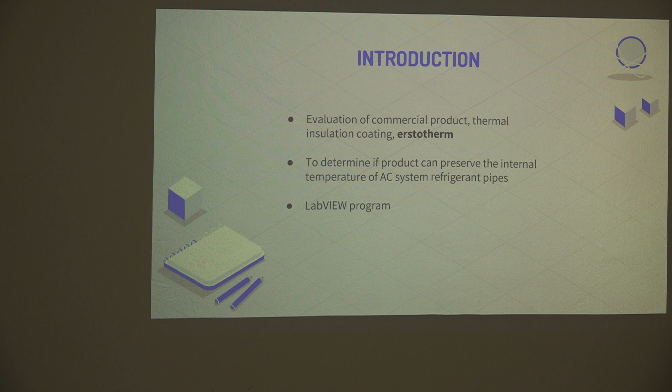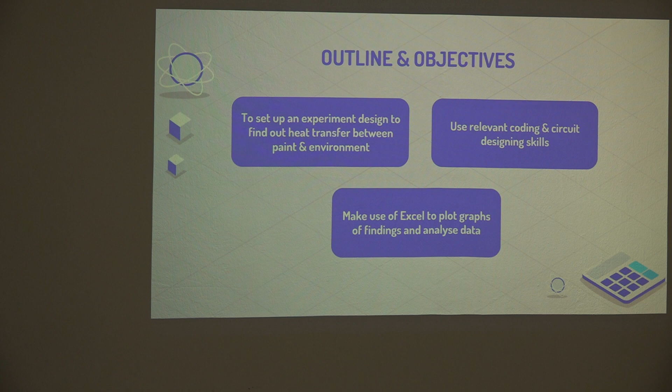So our main objectives lie in setting up the experimental design to find out the heat transfer between the paint and environment, making use of our relevant coding and circuit designing skills, and then employing the properties of Excel to plot out our graphs from our findings and analyze the final set of data.

So moving on, you can see here from the diagram, this is an air conditioning system, whose operational dynamics are significant in understanding the heat transfer theory required for this project. So in this process, it begins with the refrigerant fluid in a liquid state within the evaporator, which you can see on your right hand side. As the warm air from its surroundings passes over the coils, the fluid will absorb its heat, transforming into a low pressure gas. This then results in a cooling effect in its immediate surroundings.

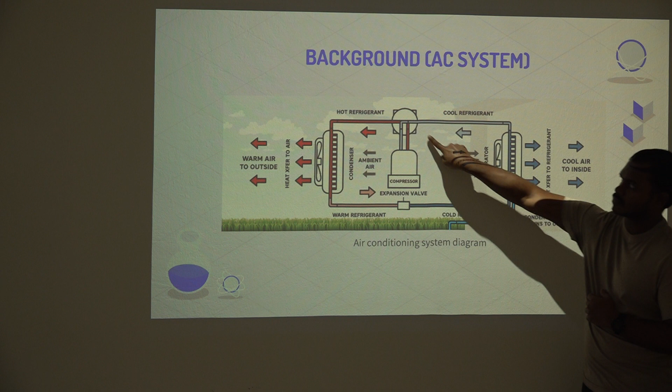So now carrying the absorbed heat from earlier on, it is transported into the condenser unit over here, releasing the heat into the external environment as the fan blows over the condenser coils. So this then causes the refrigerant to condense back into its liquid state, and this now cooled fluid will return to the evaporator where the process will repeat itself.

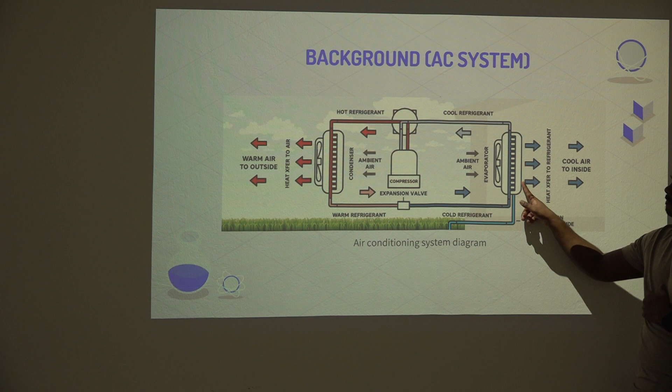Okay, so now moving on to the background of our product. The main product we'll be testing out is this thermal insulation coating, and more properties about this paint is that it has a low heat energy transfer rate, meaning that it has a greater thermal resistance to heat transfer. This allows the pipes with the refrigerant fluid, as shown before, flowing through the pipes to stay cool. So this process reduces the overall energy consumption and associated costs in cooling the fluid by minimizing the heat load on the system.

And to add on to its extreme versatility, it can be applied to many different surfaces, including but not limited to building walls, water heaters, and balconies. So lastly, not to mention, it also has a high vapor permeability, meaning that it mitigates the risk of moisture building up between the coated surfaces and the paint. This ensures optimal performance in diverse settings, particularly in the context of Singapore where the humidity levels are really high.

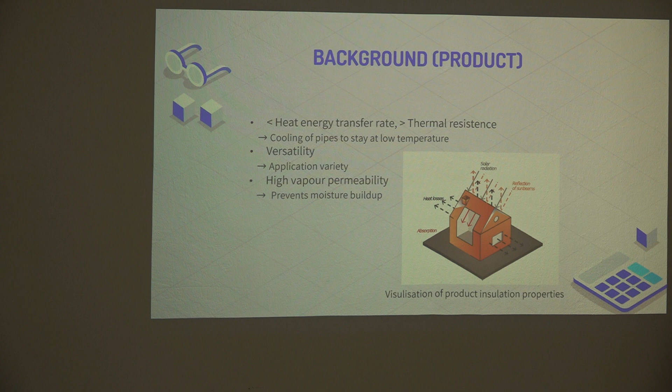So now looking at our theory and how we decided for our experiment to play out, here you can see the main formulas we worked on for heat transfer, which we can eventually apply to our final observation.

With reference to the legend, our main variable Q, the heat transfer rate, can be calculated by taking the change in temperature divided by the thermal resistance. This thermal resistance can be found by taking the thickness of the insulation material and dividing it by the thermal conductivity of the insulation layer.

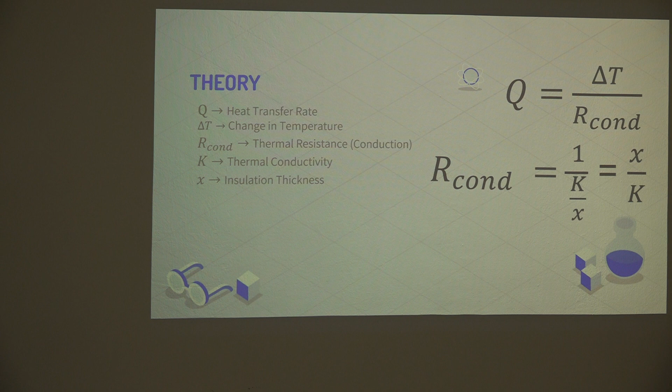Now in this diagram, you can see three different scenarios that will play out in our experiments. First, we will calculate the value Q going through the sponge, followed by that of the paint in the second scenario. Lastly, there will be a control experiment, the third scenario, which we use to determine the thermal resistance and conductivity of the paint.

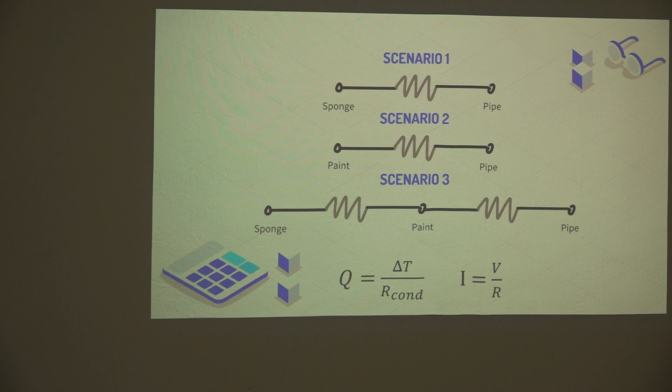As you can see in the formulas at the bottom, this one on my left is the one you had seen before, and we can translate it into a visual of an electrical circuit, where I can represent the value of heat transfer, voltage representing the change in temperature, and lastly the resistance.

Here you can see a depiction of what the actual scenarios will look like. As you can see, there are small dots on those surfaces, and those dots represent where we'll be placing our sensors to record the temperature.

To prevent any risk of the refrigerant fluid leaking out of these pipes, we decided to place the sensor on the surface of the pipes itself instead of inside, to reduce any additional risks that may pose in this project.

For our second and last experiment, you must be thinking, how will you be able to place your paint on top of the sensor itself, then place the last sensor on top, and for the last one place the thermal insulation on top.

So what we decided was that after the first scenario, when we removed the sponge insulation, there was already the initial sensor that we ensured had direct contact with the pipe surface. From there, with that sensor touching the pipe surface, we did the painting of the coating on top of it, ensuring we painted over the temperature sensor so that the paint surface going on top of the sensor was of equal thickness to the rest of the paint going around the pipe.

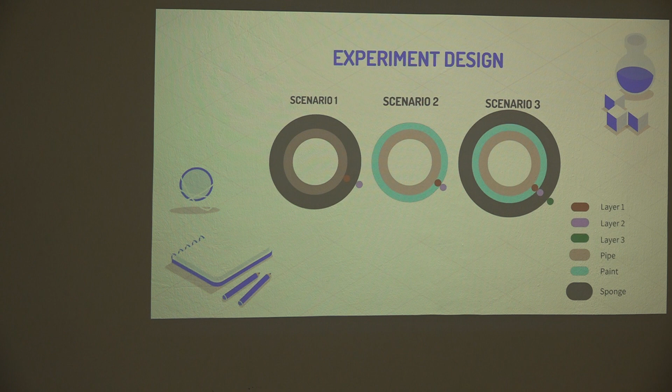Now we look at how we would set up our measurement instrument, since we weren't able to use the one set up by previous students. Some of our components used were Arduino boards, resistors, relative humidity sensors, and temperature humidity sensors.

Outside of this schematic, we also made use of an energy power consumption meter, and with this we would be able to test whether the different coatings on the pipe would affect the system's energy consumption, which would then affect the overall cost of the air conditioning running system.

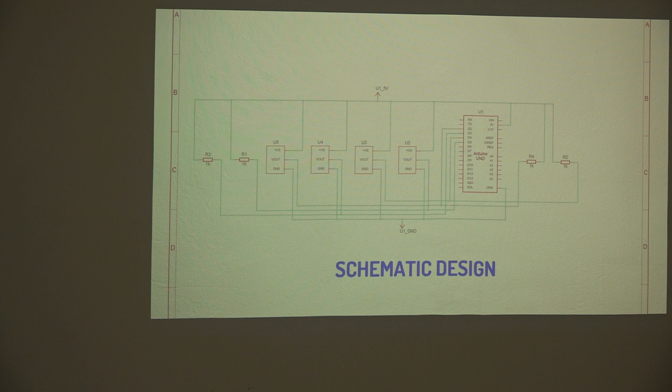Next, we can see this Tinkercad circuit that we used to simulate the running of our project, which we then translated into the wiring on the board.

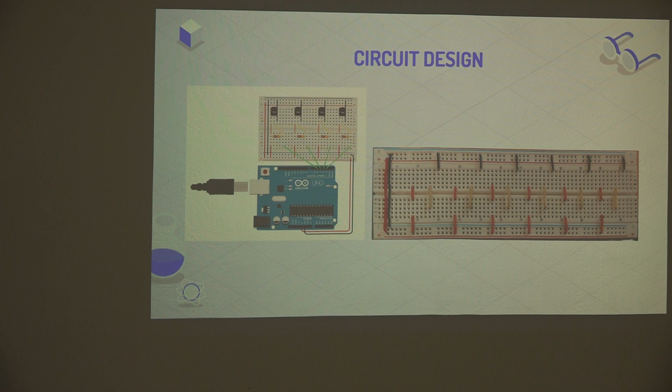Here is our actual setup of how we connected the temperature sensors to the breadboard itself. You can't really tell from here, but these yellow parts are additional insulation layers that we put on top.

When these sensors came in, the wires they had were stranded wires, which wouldn't be very efficient if we placed them into the breadboard, and the testing results from the program might not have been as accurate, which is why we used our soldering skills and soldered solid wires onto those stranded wires and then connected them into the breadboard.

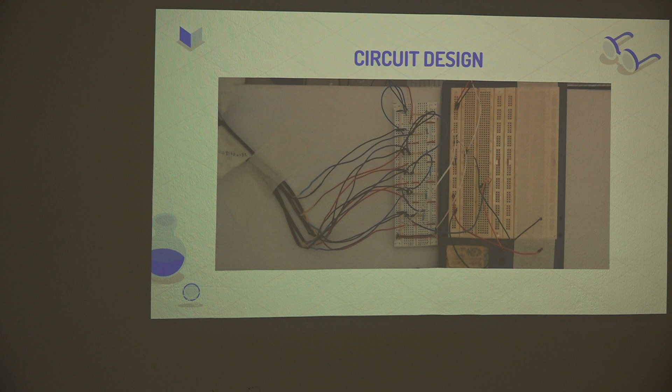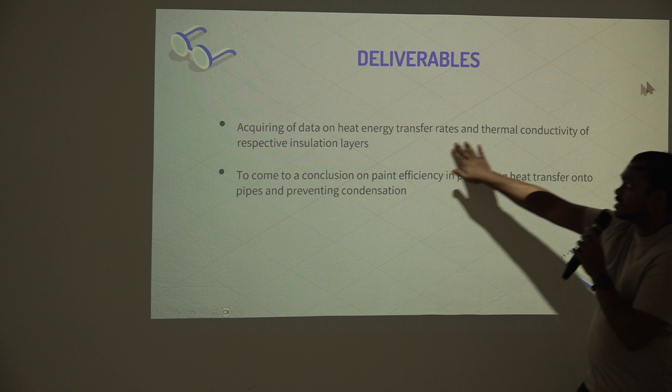Alright, so now what do we get from it? First and foremost, we are acquiring data on heat energy transferred and the thermal conductivity of the insulation layers, meaning the sponge and the paint. And why we need this is so that using the theory and calculations, we'll be able to determine the efficiency of the paint and see if it's really better than the sponge, as well as compare it to the data sheet.

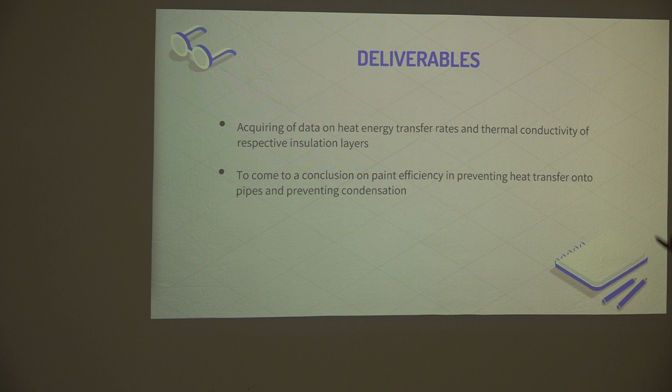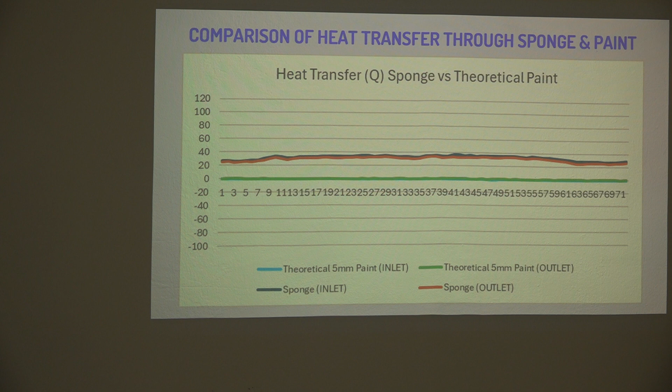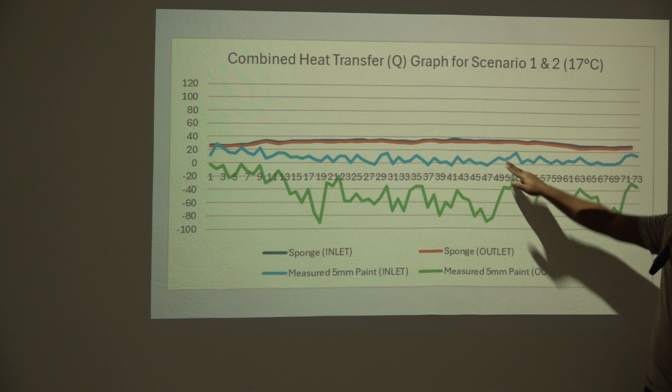Over here, the paint is actually doing pretty well, it's doing better than the sponge overall. So once again, for 21 degrees, it's actually doing better than the sponge. It's doing a pretty good job so far.

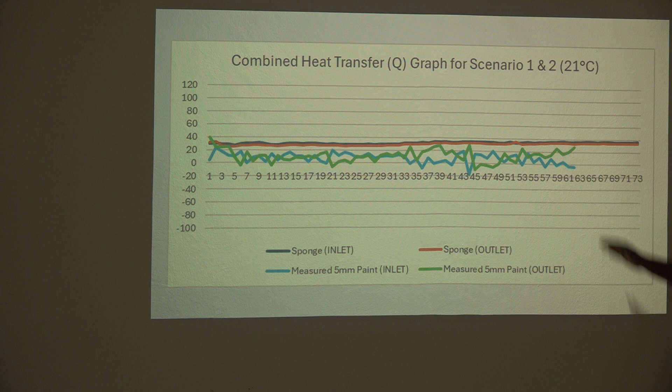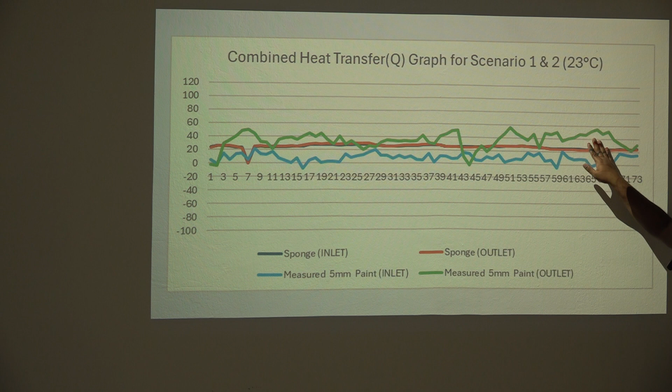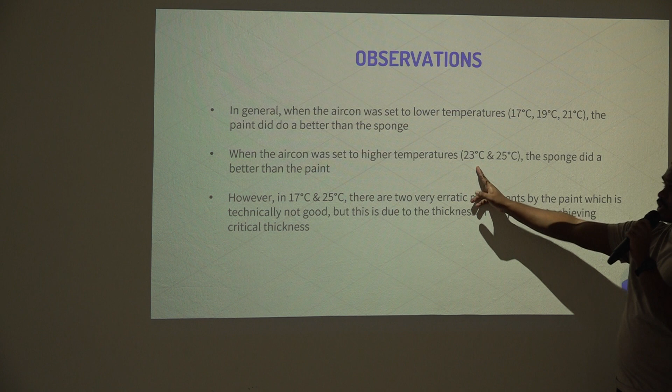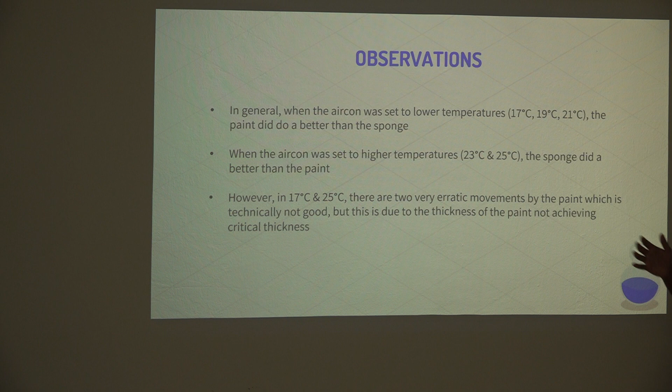So yeah, in the earlier stages for 17, 19, and 21 degrees, it was doing better than the sponge, until it came to 23 and 25 degrees, where it was allowing a lot more heat to pass through than the sponge. As I mentioned, there were some erratic movements, and all this is due to the thickness of the paint. There's something called the critical thickness of insulation, which the painter didn't really reach - he only painted 5 mm of paint.

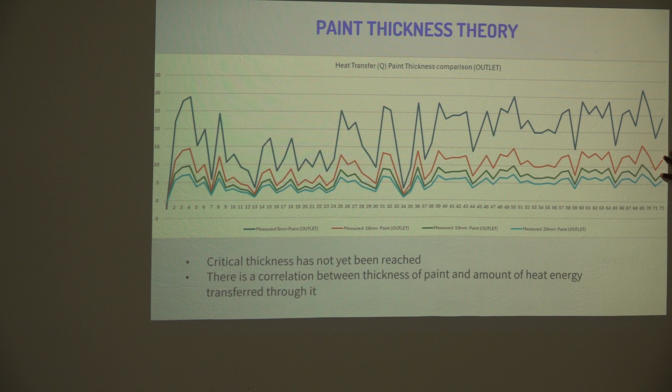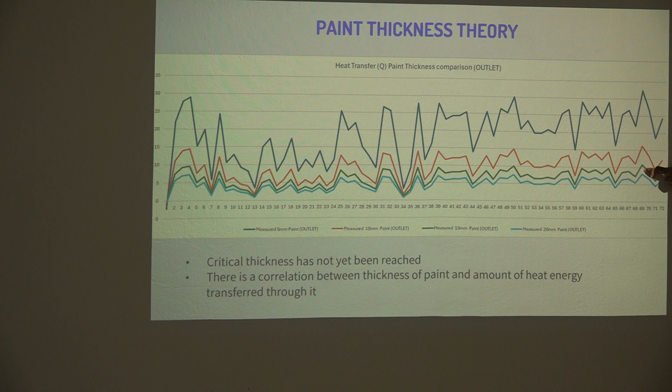Whereas over here we did a calculation - this is the heat transfer of the paint in correlation with the thickness of the paint. So this is 5 mm, what is painted, and then this is 10, 15, and 20. As you see, as the thickness increases, the amount of heat passing through also decreases - not proportionally, but it does decrease. And as you can see, as it gets thicker and thicker, the difference in heat transfer actually gets lesser. That is when we know it's reaching the critical thickness. So optimally, it will be about 15 to 20 mm that we would most desire.